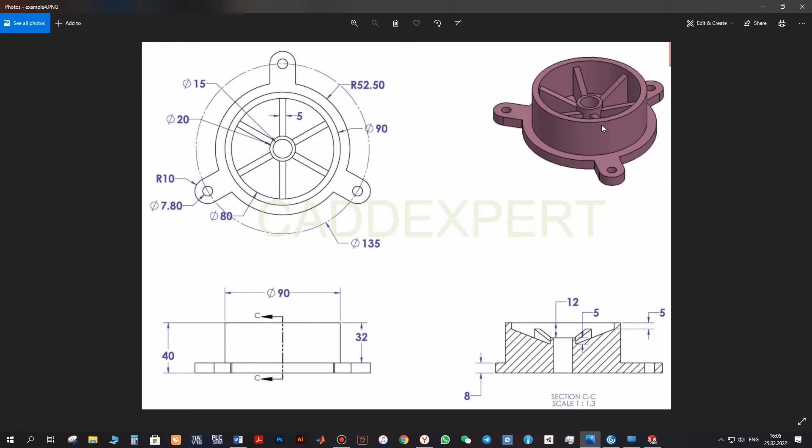This video is another example on simple assembly. This model presented on the figure can be created as a single part, but it also can be created from different parts, as what we will make during this video. First of all, I will create this base, then create this outer part and this inner parts, and then we assemble them together.

First of all, we need to go to SolidWorks and create several different parts. Here we have the top view, so I'll also start drawing from the top plane. I go to the sketch, select top plane, and first of all I will draw this reference circle.

Which has the diameter 135, so 135 divided by 2 will be the radius. And if I select for constructions, I will have this type of line here. Next, I will create another circle with a radius 52.5.

And then I will create this object here. I need one more circle with a radius 10. I'll create it here, radius 10. And then on sides I create two lines.

If you want to start drawing a line from another point, you can click the left mouse button twice, and then you can start drawing from another point. And if you want to finish drawing, you can click the right mouse button and select.

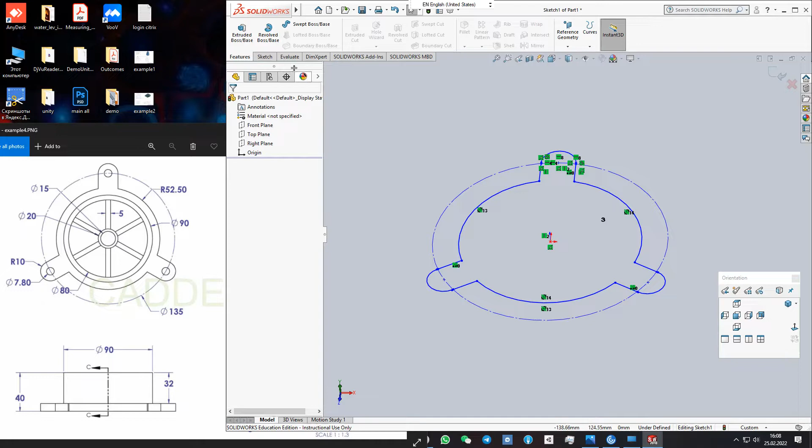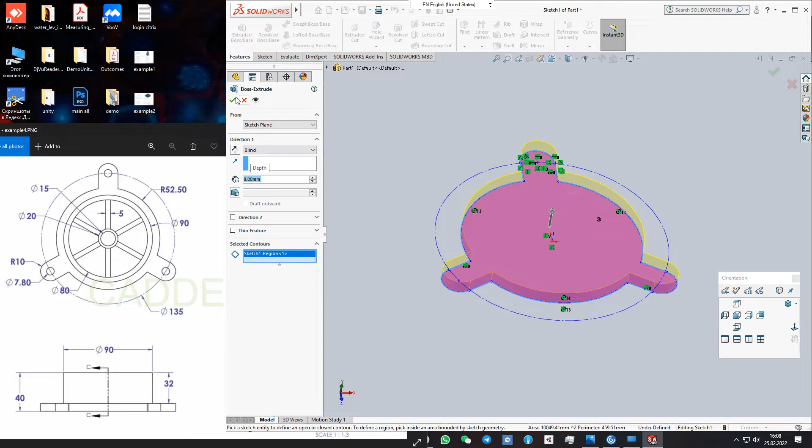First of all, here we need to select contours, what we want to extrude, this one, then deselect thin feature, and we need to extrude by the value of 8. So here it should be 8 millimeters, and apply.

Then I will draw this circle here. For this procedure I need to click sketch and select this plane. Then I will draw a circle here. It has diameter 7.8, divided by 2, so we obtain radius 3.9, and then I also duplicate them.

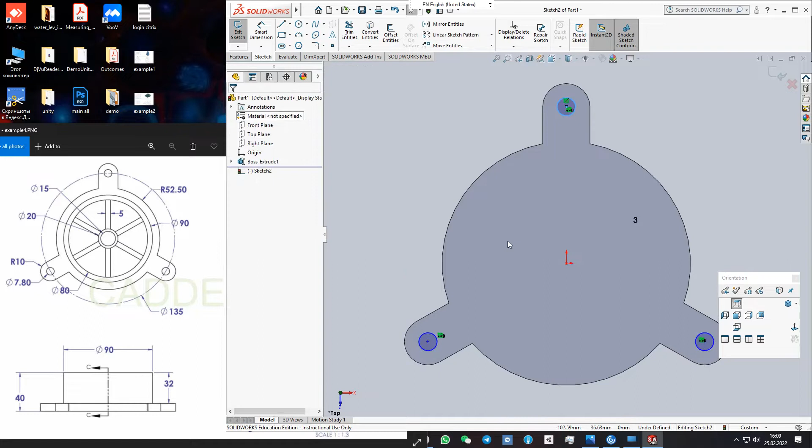Decrease to 3 and apply. And then I make extruded cut. Here we have several options how to make extruded cuts. For example, we can make extrusion by distances, or we can extrude through all.

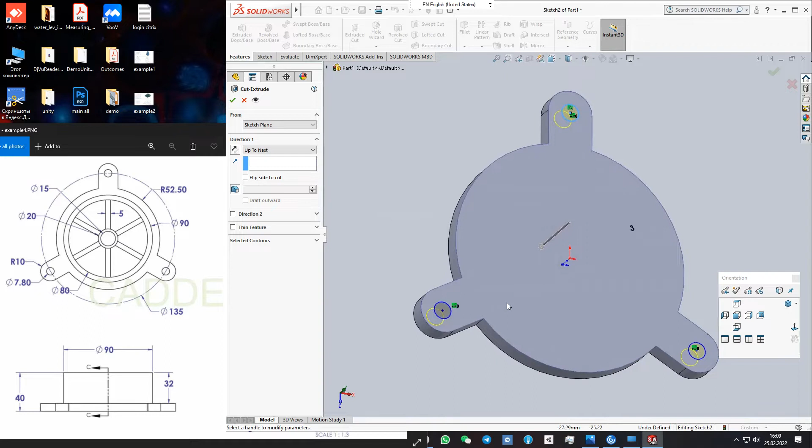Here we have just one part, so it's not really visible how it will work. It also goes up to next, and it will be extruded to the next surface. So it depends on the model you have. Here we have just this flat model, so it doesn't really matter what type of extrusion to use.

So we just apply it and we have these extruded cuts. We're next finished with that base, so we save it and create another part. Click OK.

Next I'll create this outer part. Again, I will start drawing from the top plane. It has inner diameter 80 and outer diameter 90. Here I'll draw, so 80 divided by 2, radius should be 40.

Then I can draw one more circle and make the extrusion, but I'll use another way of extrusion. I will add the thin feature, and here the width should be 5. The width here is 5 because 90 minus 80 is 10, and we divide by 2, so 5.

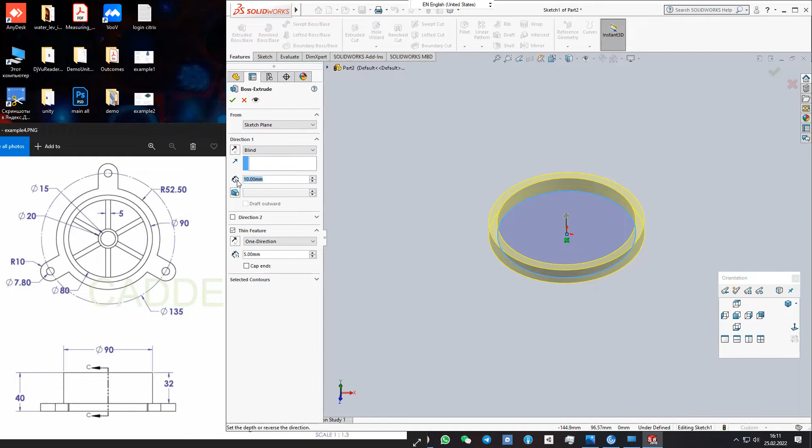First of all, I draw this inner circle. So here we can select thin feature direction, to decide how to thin it. First of all, I draw the inner circle, so I need to add the thin feature out. I leave it this way, and I need to extrude it by the value of 32. Here it's 32, and apply.

Save this part and move to the next one. Also top plane, and I will create this cylinder. Top plane, and here I will draw 2 circles with a diameter 15 and 20. Here 15 divided by 2 is 7.5, one more with a radius 10, and I extrude them.

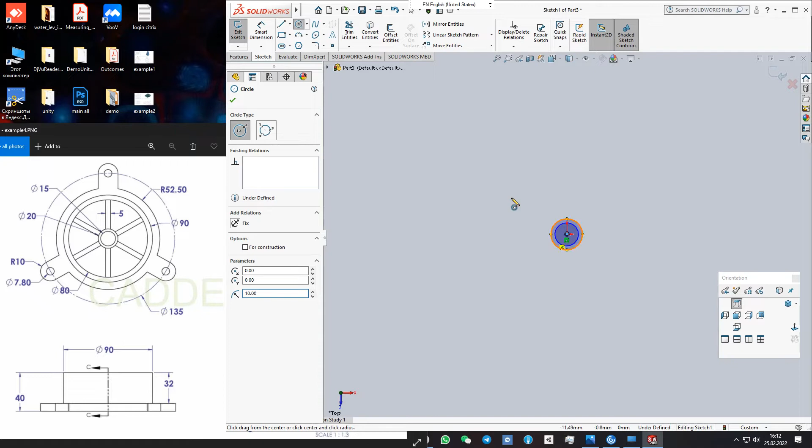Extrude by the total height 32, and here the distance between top and this dimension, so 32 minus 12 equals 20. I extruded by 20. Okay, I'll save it and move to the next last part.

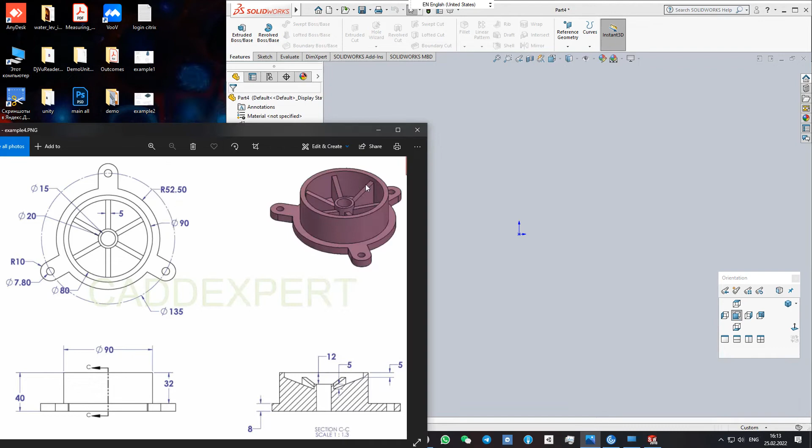Then I will create these parts here. Also, I will start drawing from the top plane, select sketch, select top plane, and draw two reference circles with diameter 20 and diameter 80. So the first one should be radius 10, second one radius 40.

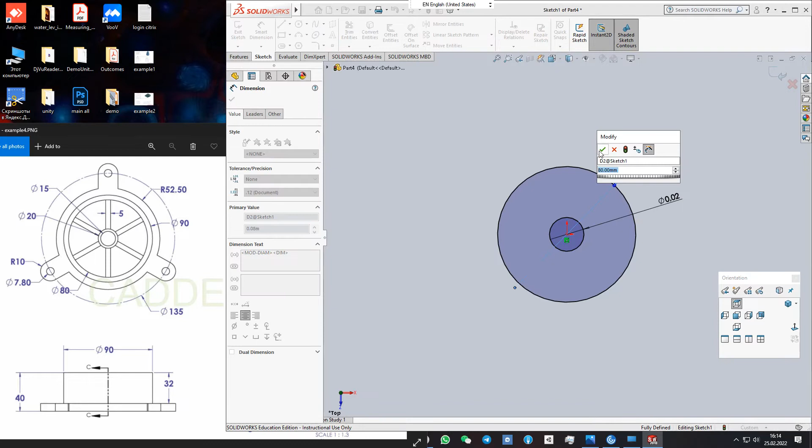And here I'd better define the dimensions so they won't change. Here it should be 20, and here diameter is 80. In order to see these values in millimeters, I have to select system MMGS, then double click left mouse button, and I will see them in millimeters.

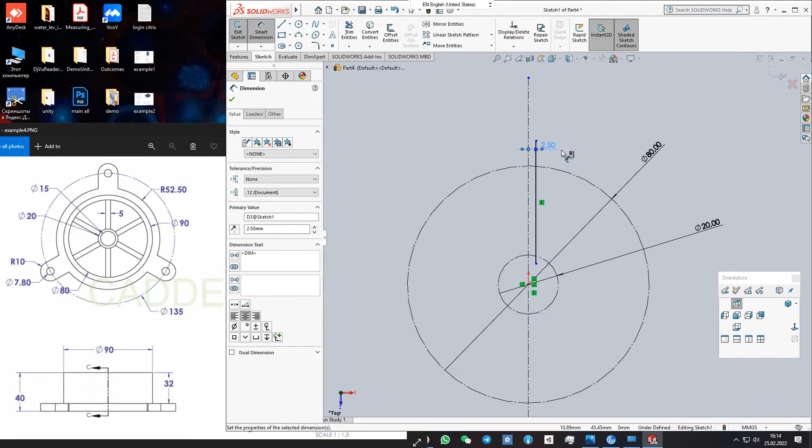Also, I will select the option for construction, and then create a center line through the origin. Then I'll draw this line here. First I'll draw some random line, and then define the distance between the center line and this line. Here it should be 2.5, as 5 divided by 2 is 2.5.

Then I trim the parts I don't need here. After that I will mirror this line about the center line, apply. After that I will close the circuit here and here, so I select this 3-point arc, and here it's shown how it will be drawn from first point, second point.

Third point. So also first point, second point, and finish here, third point. Same above: first point, second point, third point.

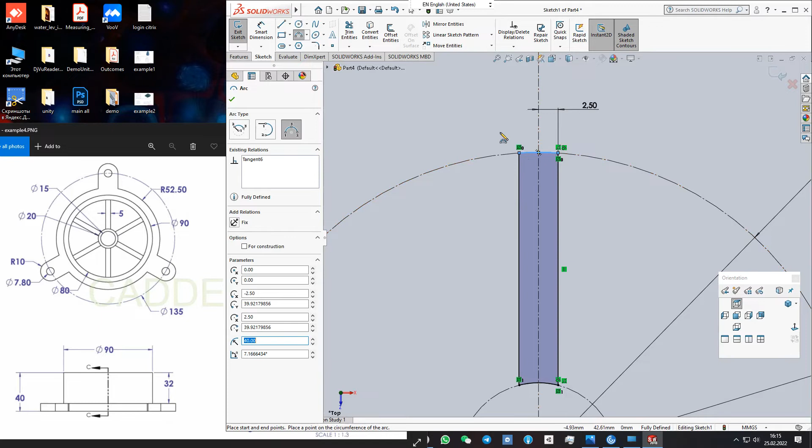After that we can extrude it. Features, extruded boss/base, and then value. Here the total height is 32 minus 5, so 27. Extrude by the value 27.

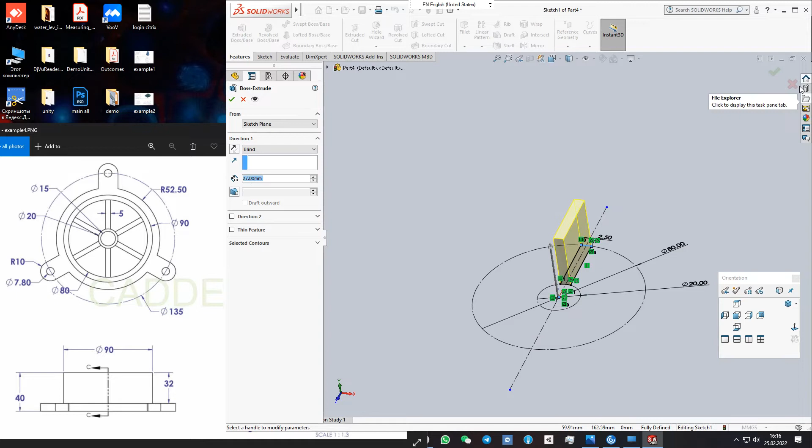Okay, then we need to add this incline here. So here we have feature, fillet, and two options. Here it will be rounded edge, and here the sharp edge. For example, if I click this one it will be rounded, but we don't need this one, so I select the second one.

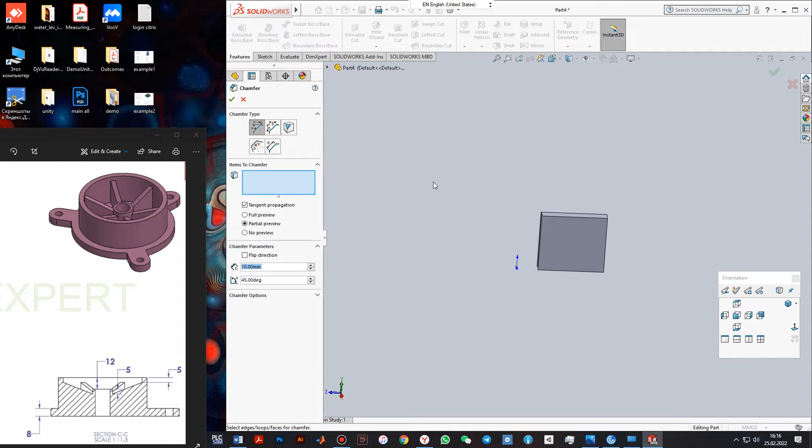And here we have different options for how to create the incline. Here, for example, it will be defined by distance and angle. And here we can select two faces and define it by distances. For example, select the first face, then the second face, and since they are not symmetric, we select asymmetric here.

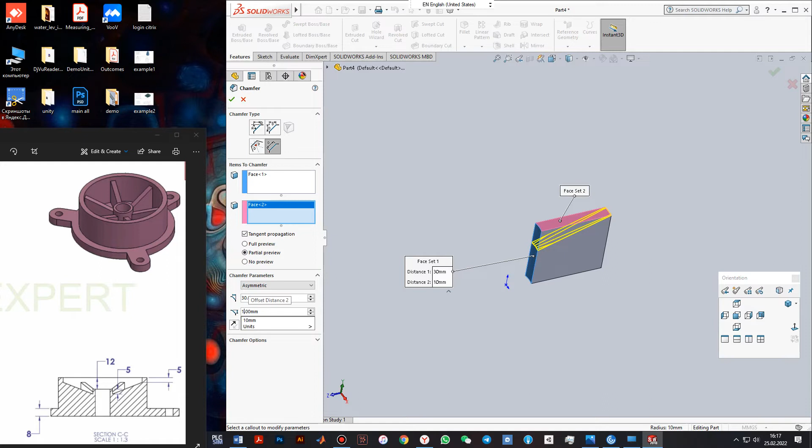Then we can define two distances. For example, this one should be till the end, so we leave this value, and the second one we need to calculate. Here the total height is 32 minus 12 is 20, and minus 5 is 15. So here it will be 15. Okay, and we apply it.

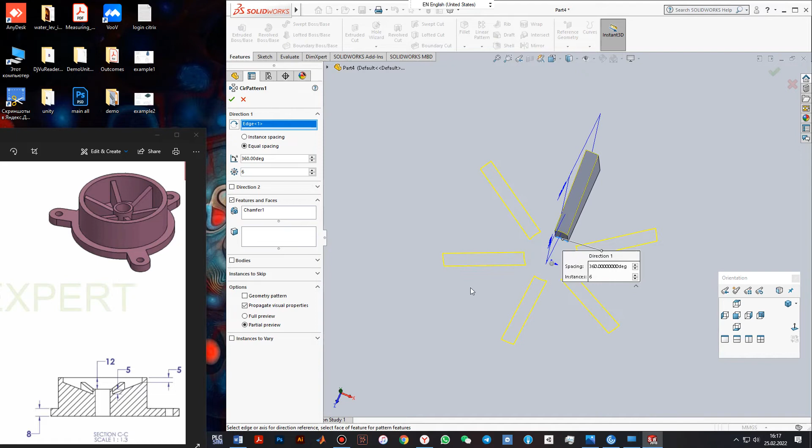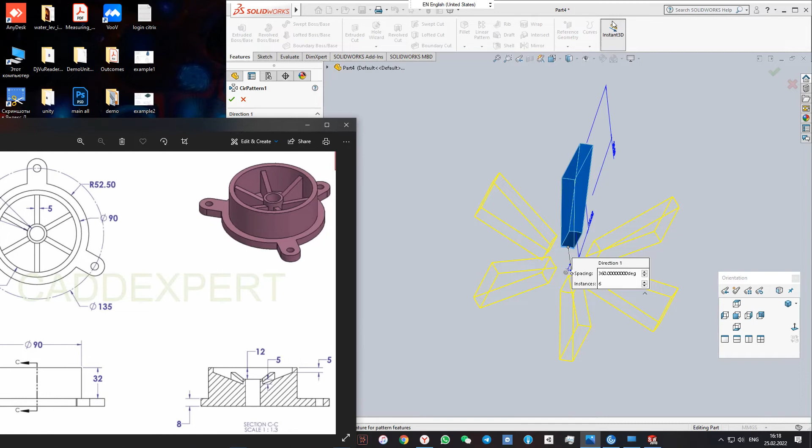Next we also want to duplicate it, so we select circular pattern, then direction. For example, we can simply select this edge. Then for features, you can just select bodies, select this body, so all of them will be copied. Here we have 6, so here we also have 6. They also duplicate around 360 degrees, so we apply it.

And we also save this last part. After that we can move to the assembly. Here, click new, assembly, okay.

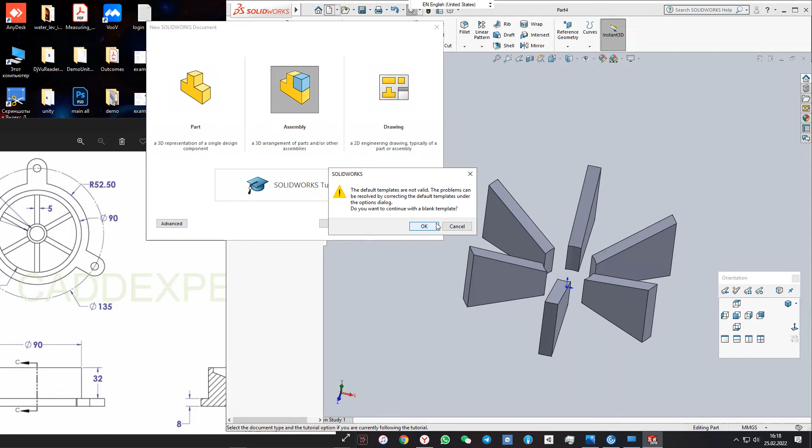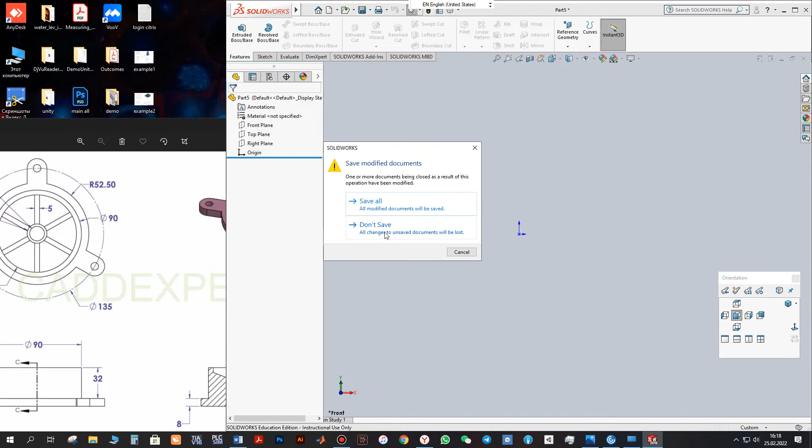And again, some problems with the Citrix software. Usually the assembly window looks another way. Here we will have the objects we just created, so we can simply drag and drop them. But with Citrix we need to close SolidWorks and open it again, and then click on assembly.

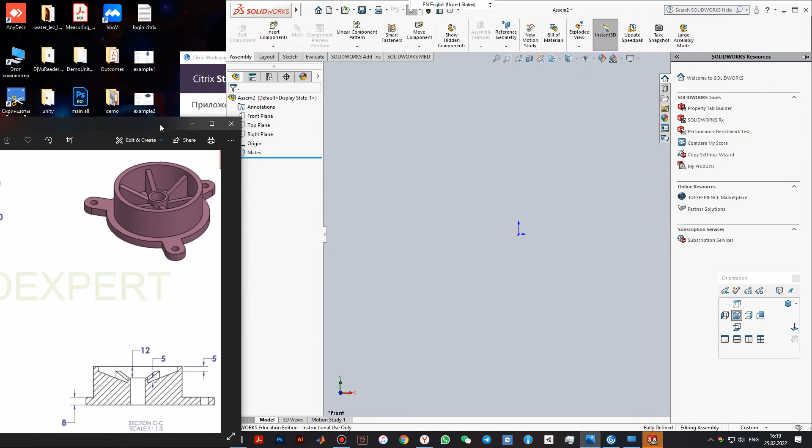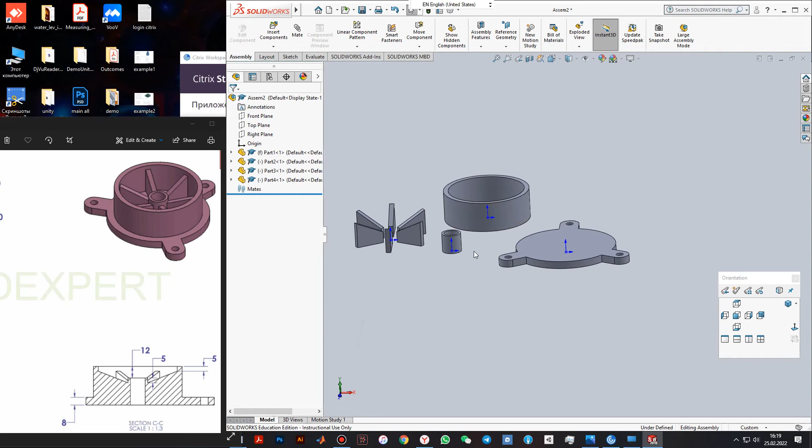And insert components we've just created these parts. Open. First of all, our base, we attach it to the origin. Then this part, the last part. Here we can simply make alignment by our origins, but I just want to show how the assembly features work.

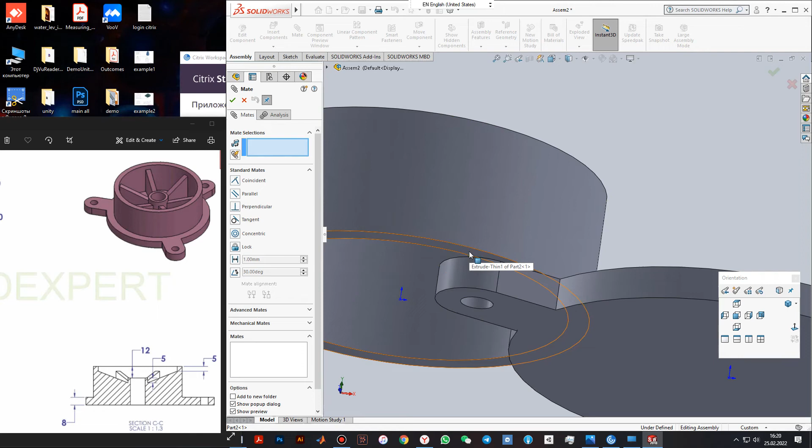So here's a simple way to just align elements by its origin, but I want to show a different way, in case you have different models, so you can handle the assembly. For example, for the mates, we can select some. For example, I want to align planes, so I select this plane and align it with this plane. So now they are aligned.

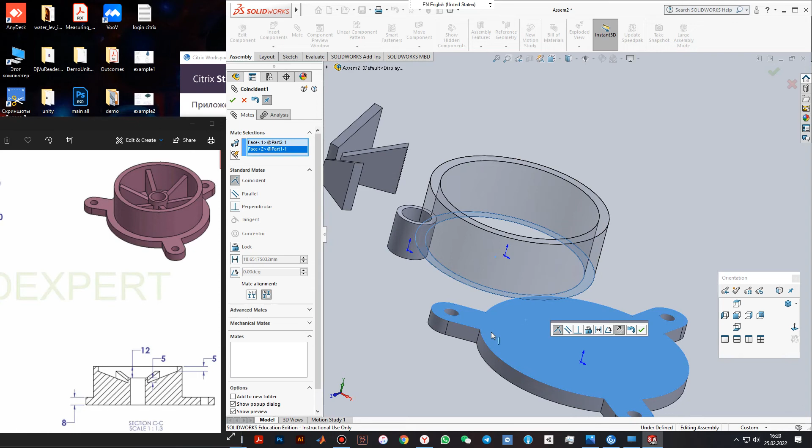Coincident here. And here you have different options - they can be parallel, perpendicular, and so on. For example, I click OK.

What else can I do? For example, I can also align circles. I select this circle, then this one, and make them concentric also. And OK.

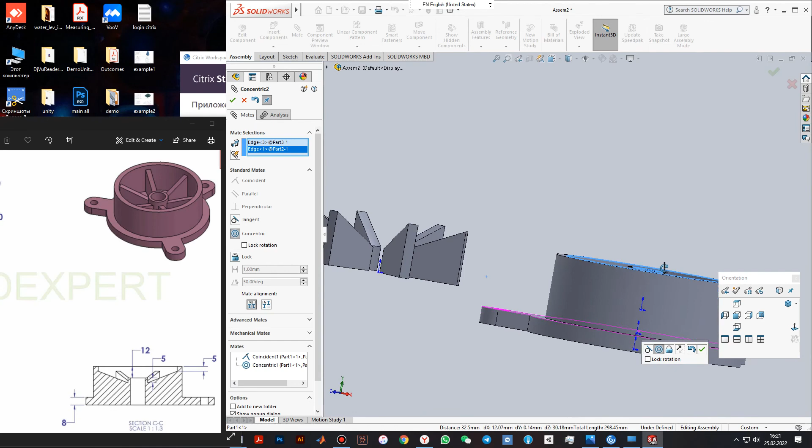Next one, I can also select a circle, this circle. They will be concentric. And here also there are options for how, if you want to align it this way, you can rotate it. OK.

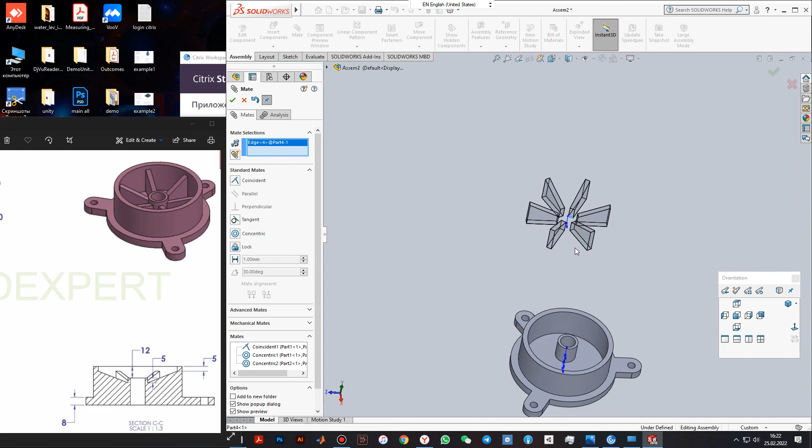And next, this part - you can also, for example, select this edge here, and also select this circle here, so they also will be aligned.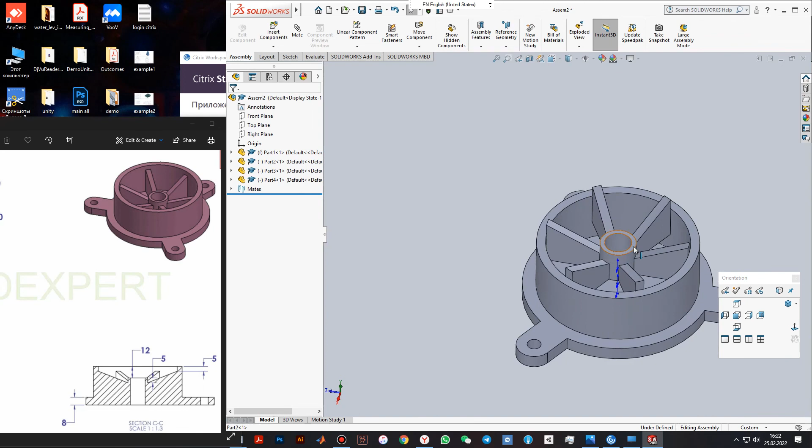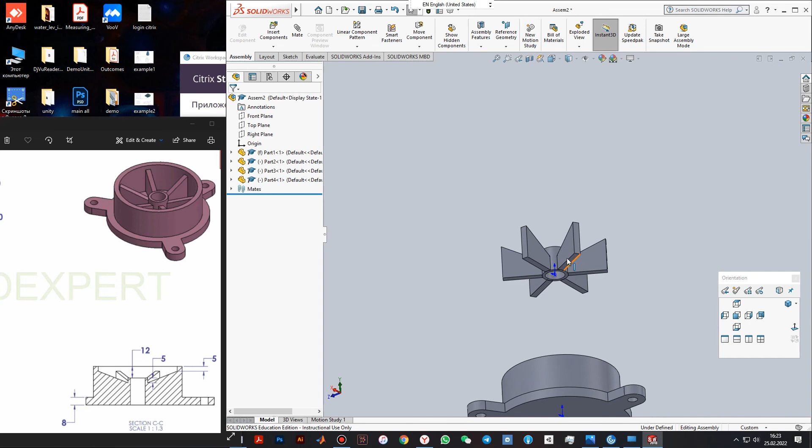And next, what we can do here, for example, if I move it up, it moves, but they are concentric. So we also need to mate this plane and this plane here. First of all, we can select the mate tool again, then for example this plane and this plane, apply.